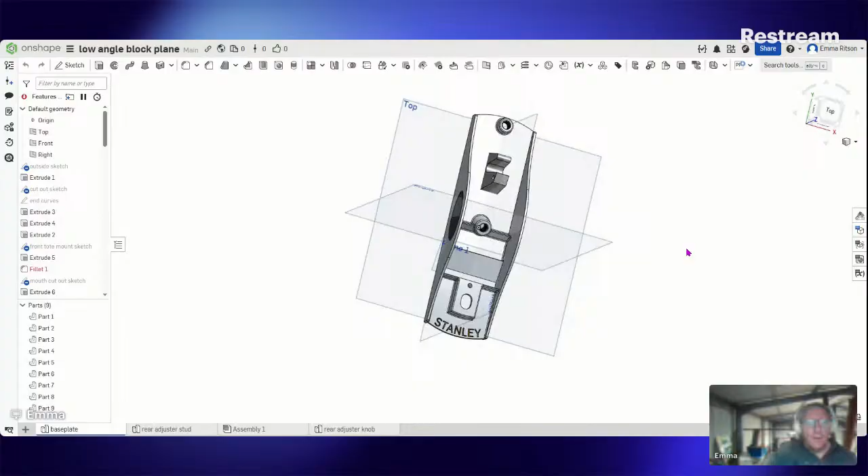I think that does it. Yeah, there we go. So Onshape, we're all familiar with it, we don't probably need to talk through it. This is what we got.

Now stirring up the lakes down there, that'd be nice. You need a shack and a case of fortified red and a spare weekend. Someone to snuggle up to. It's not snowing here.

So that's where we got to. I ended up cleaning up these letters and positioning them nicely around there. OnShape at this point, I don't think has an array letters along a line function, which is a bit of a pity. We've got a poor connection, sticker sticking up here, so let's see how we go with this.

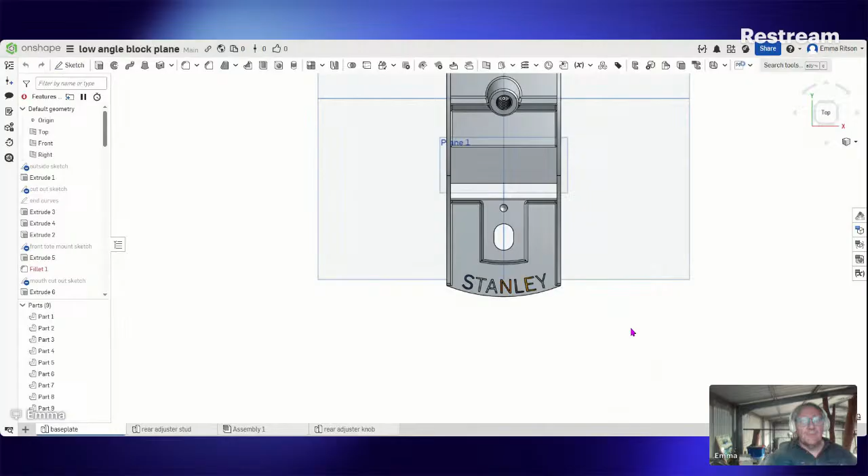All our letters are lined up as nice as I can make them. You find that if they're a little bit one way or the other, you can select them all and rotate them on the radius of that line and move them backwards and forwards so they're in the middle. So we can finalize that. They're all different colors, and that's because they're all different parts.

So down here we've got part 1, part 3, part 4, part 5, part 6, part 7, part 8, part 9. If we just use a Boolean union, and our tools is this, select that first, and part 2, select that, I think. Oh, part 4. Wait for it to do its thing.

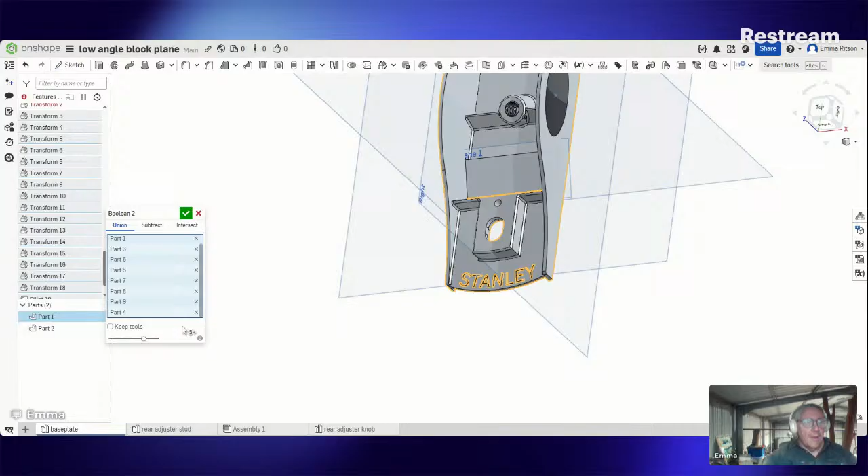And press there to finalize it. Basically, that makes it all one part, so that's done. That's not terrible. We need to do the same with this piece, which I've modified or arranged or anything.

We could just use a Boolean union, and this one, and this one. If we select them in that order, we maintain the surface finish of this piece when we put it together. Just as an interesting thing, if we reorder this, it changes to how it was on the other piece. See, they are different colours.

We've still got two parts, we've got that one and that one. So, Union, and the tools of that, part 1, which we haven't renamed yet, and part 2. We find that we've only got one part in here, and these pop up in this window as you click on them. So if we... there we go, it's looking pretty good.

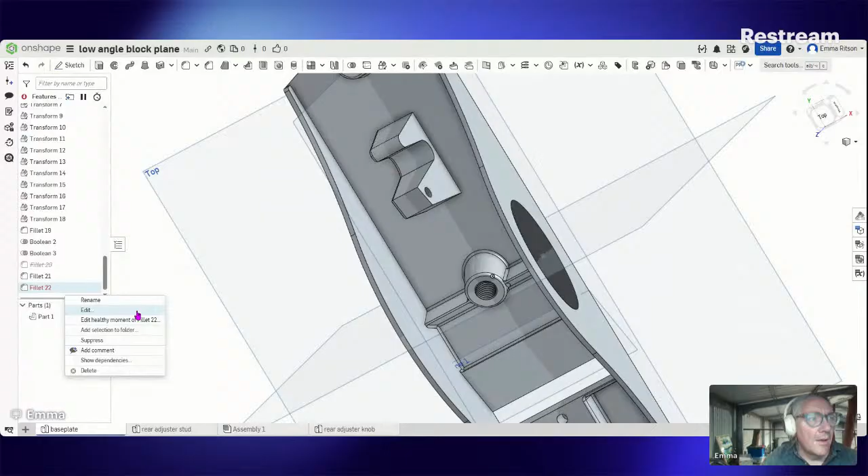Do the thing. There we go, we've got orange line again, so that should work. Now if we put this fillet here, down here, and unsuppress it, it should work still. There we go, beautiful.

So that's that part, it's pretty well finished. We've still got something to do, and that's to put a groove around the centre of this. Now I believe that was put in with the rotary cutter, so it's got a round corner in the front here, in this part of it it's got a round corner. I'm only guessing at the diameter, but let's do that.

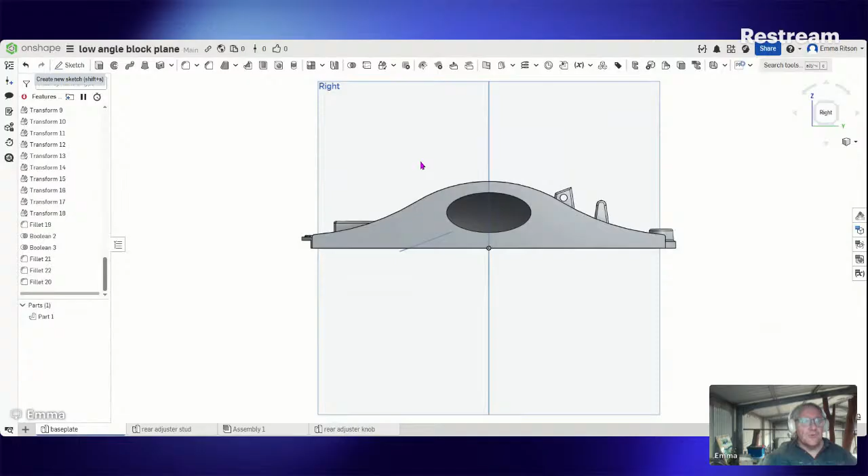Our right plane is on the centre line, so we can just put a sketch straight on there for that. And looking at it... oh gosh.

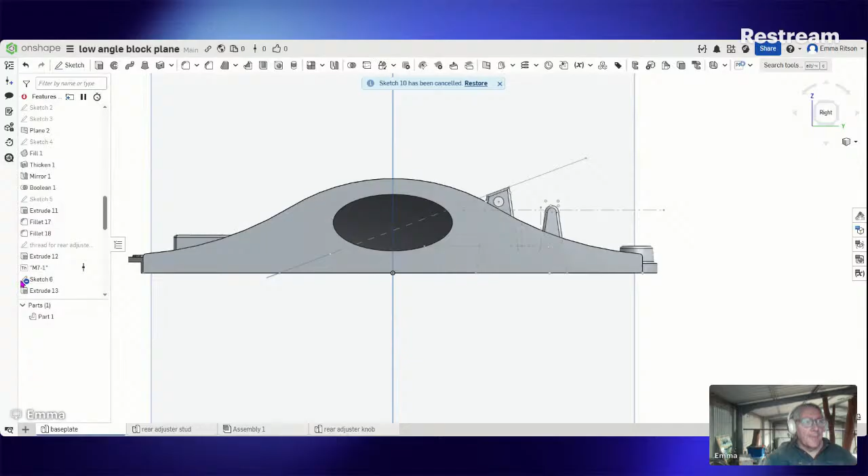Let's have a look here. Sketch 5, sketch 6 sounds right. Let's turn sketch 6 on so we can actually see it. And let's turn off part, or hide part 1. And all we've got left is if we make another sketch on the same plane, sketch 10 on the, and then we have a good look at this. The light here so we can have a look.

Could have washed this first, we've got dust everywhere.

Well, I reckon the centre line is about where that hole is, and we're about 5 mil up from this surface. So if we draw a line here, across here... escape, and put a dimension on there so that this one here is there and there. We're not far out.

I think we're going to change that to 4 millimeters because it's a little bit below that bottom, that centerpiece. Four millimeters. There we go.

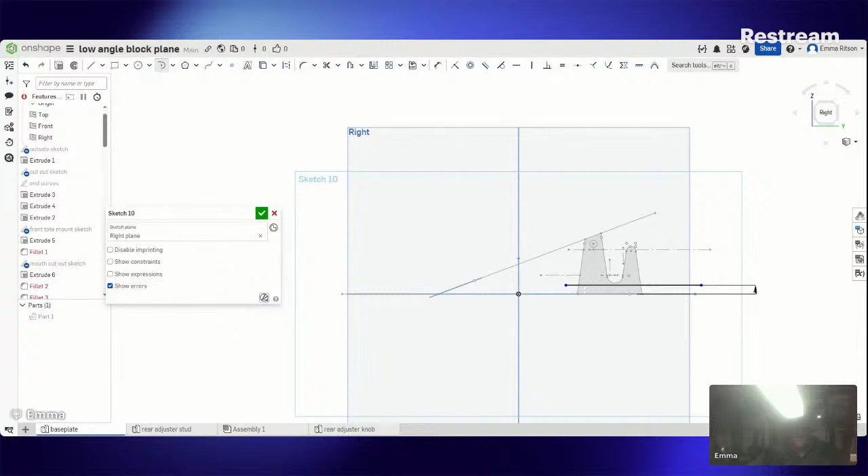And the curve, the tangent arc. Probably not the easy way to do it. Let's escape that and just put a center point arc there, down to there, around there like that, I guess, and we'll trim, which is the M button for a shortcut.

That out of there, we'll draw the rest of this box out of the way here. And hopefully that should shade itself in nicely there like that, so it's ready to go.

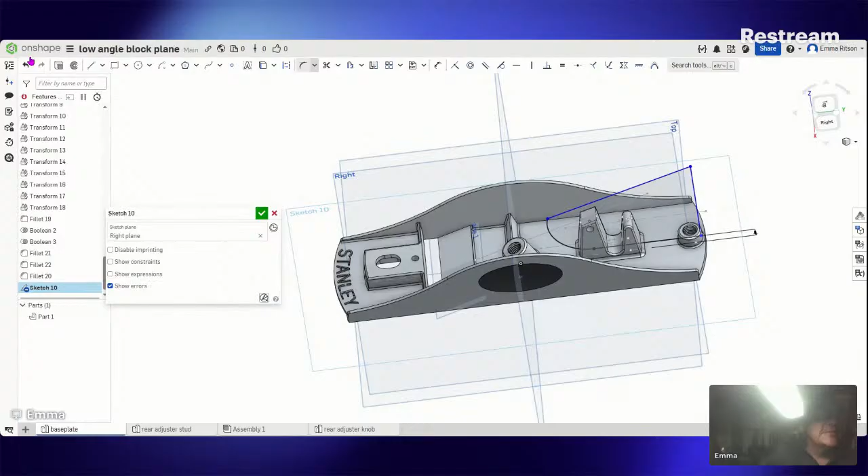And if we turn part 1 on, that's where our radius should go. Let's extrude that. I reckon it's 2 meters deep... 2 millimeters.

There we go, it's a removal. We'll remove that from that piece. And it's symmetrical, so it's 1 millimeter each side of the plane. And click that. We can turn off sketch 6 now. I'll hide that, there we go. If we press P, we can get rid of all those planes and have a look. That's looking pretty good, I reckon it's probably not far off what it needs to be. So there we go.

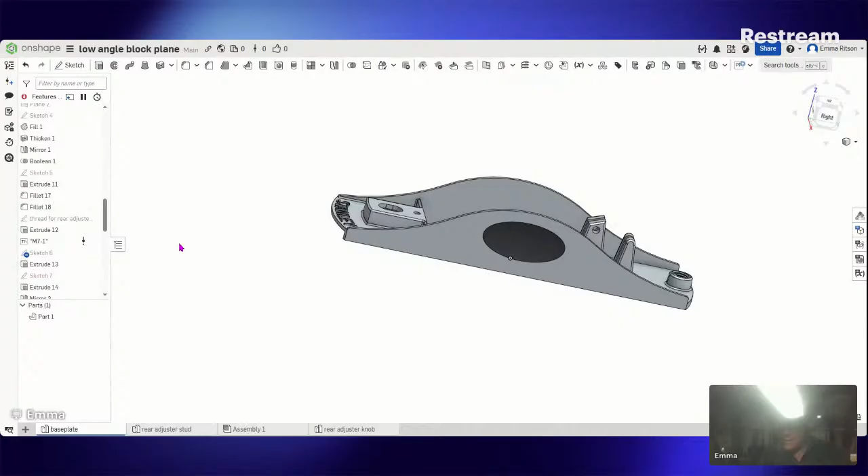So we could probably do a little bit of... we change the appearance, make it a dark grey all over. It's not terrible. And then we open this over here, which is our appearance panel.

We can add appearance to face, which could be that colour, probably wouldn't look terrible. And that one, our machine surfaces. That one.

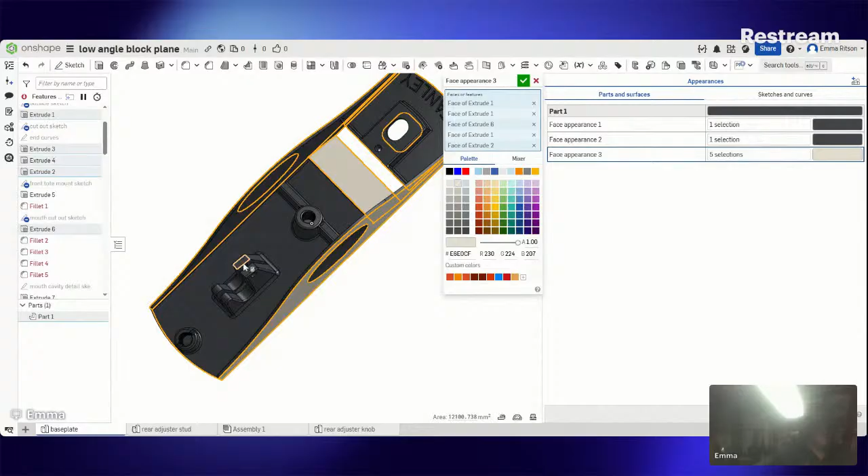What else have we got that's machined? This one. And this one and this one. And I've only got one of them, we'll do that one as well. There we go. And this end here. And this end.

And we finalise that, and that's looking something like. We can close that again, just click on that. And if we have a look at this, it's looking pretty good.

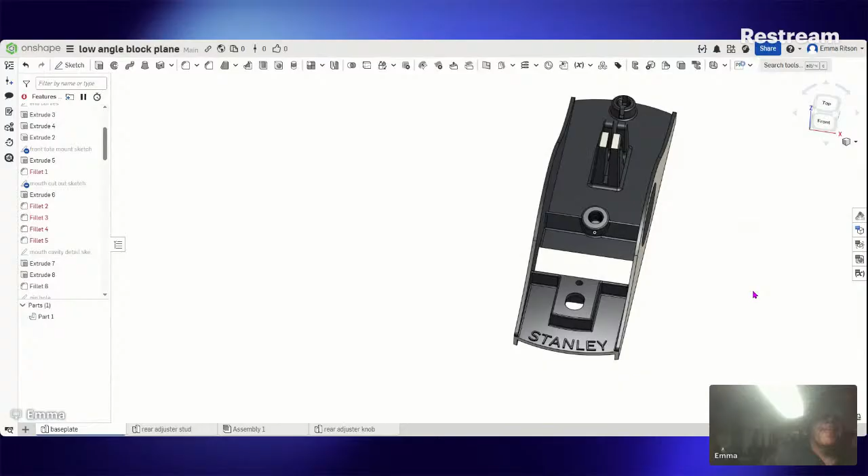So that's that part finished. If we have a look at our assembly where we were before, that should automatically update, and that's what we end up with, the brass nut.

Now we've got some animation sort of half ready to go. If we give this a spin, it goes up and down the thread.

What's next? What are we going to put on next? There's some levers and things. Probably this piece in the front looks a bit incomplete without that.

So let's do that, we start a new part studio. Create Part Studio there on that front corner. You can't see me at all because of the light, I apologise for that. There we go, we've got a new Part Studio.

What are we going to do? Have a look at the part.

Zero outside, that's a bit miserable. So this is the frog, or the front piece, or the, we call it the adjustable mouth. It's not really the frog. It's got an S and a B on it, I've got no idea why. It's got a raised boss there. It's got a flat surface. It's got a bit of an angle on this end, and it's got a round piece to match on this end.

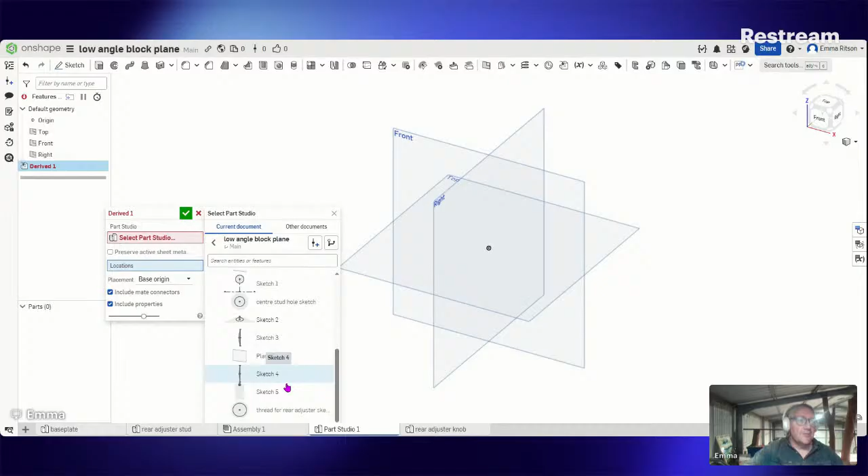So we can select the base plate. We select part 1. Or we can select one of these drawings if we know which one we want. That's a bit complicated. Let's just set the part. We should have one.

Our base origin, that's where it's going to be, just exactly in the same spot. What that's done is brought that piece from our base plate drawing into our parts, which we've got to rename. Adjustable mouth, we'll call it. So we have part 1 in there.

If we look at the bottom here, and we put a new sketch on this plane, which is right on the - use the use or the vector button. We can then select this line for our sketch, this line for our sketch, this line for our sketch, this line for our sketch, probably this line and this line for our sketch, and this line for our sketch.

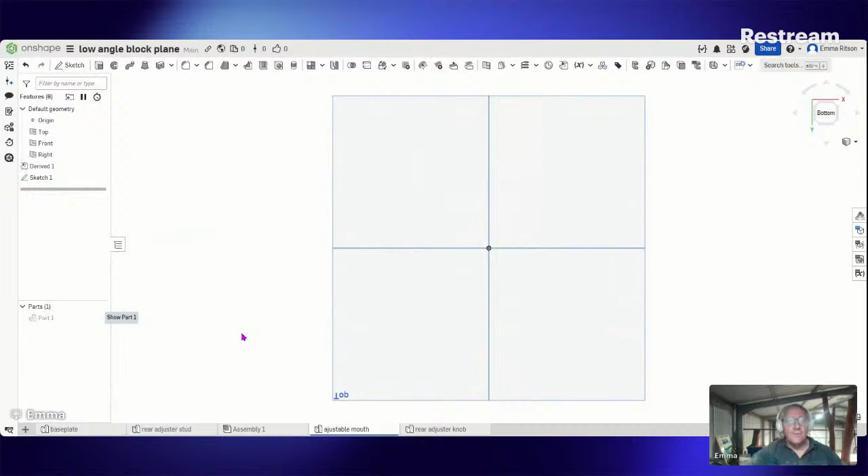Then all we need to do is turn this part off, close it, and find out that it hasn't actually done anything. Why is that so? Sketch on our top plane, and we're going to use the use button.

Let's try again. That one, that one, that one, that one, that one, that one, that one, I think. There we go, that worked. We turn that off now. We've got a sketch that's that part. Very good.

It's probably out of sync. Yeah, I'm sorry about that if it is.

Where'd my ruler go last night? Anyone remember? I'm at that point that I can't find anything. It's getting a bit beyond a joke, to be honest. It's under my mobile phone. Got a ruler. A little bit prepared.

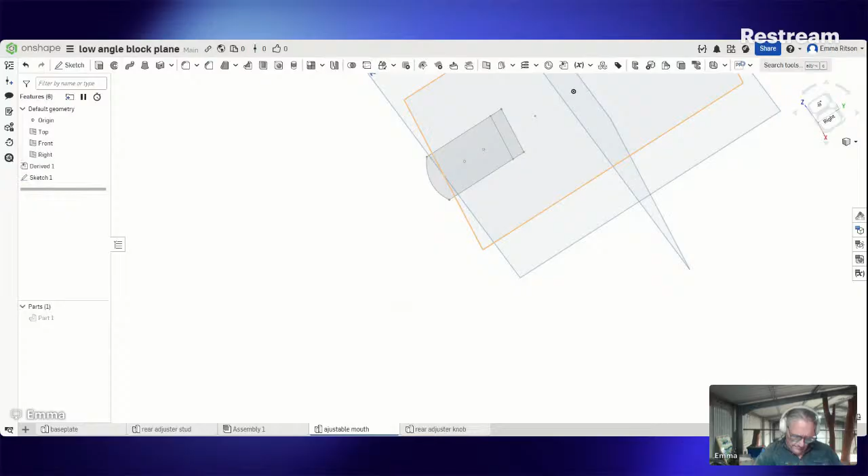N brings this round normal. Doesn't actually. There we go, that brings it round normal. Pressing in, we can zoom that in. Our measurement here - look at this sketch.

From this line to this point here should be, according to this, probably 42 mil. So 42.

It'll try to change that, but it won't have much luck. So what we do is click on that and press delete, because that's the one that's holding us up. Or it was the one that was holding us up.

There we go, it's that one. That's not parallel, so it must be this one. Nope. Nope.

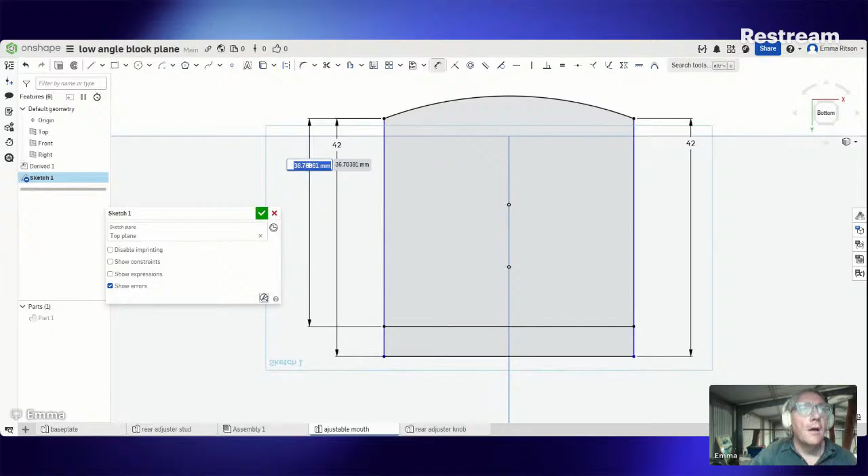It doesn't work. Control Z is probably our friend. Let's delete this line. We'll put another line in. Press that and Q for a construction line. And we'll put a line across here, something like that.

Then put a measurement on that. Because that's not a derived line or a projected line, it won't give us problems. There we go. Doesn't seem quite right, I'll have another look at that. We'll call it 39, I think.

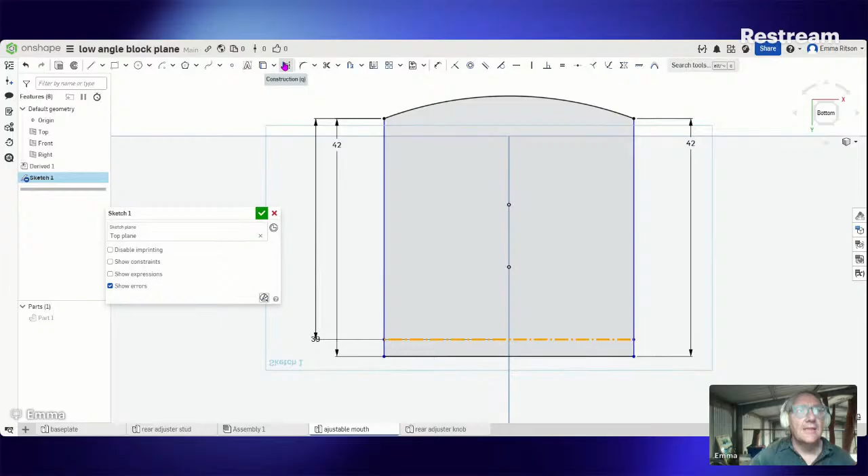So we can press M for trim. We can trim this one. We can trim this one. Press escape or click that button again to get rid of it, and then highlight that. We can select the construction, or press Q again, and it changes that from the construction line. There we go, so now we've got that raised up bit.

There's actually a pattern around this piece. I think we're going to offset some lines on the sketch. We've got 2 lines selected by some crazy mistake. I'm just going to select one, then offset. Do it. And it's offset it the wrong way. So we click that arrow, just reverse it. And then left click, and it comes up with a little window. That front one, I reckon, is about 4 millimeters.

Hey, Mark. My network's probably not good, to be honest, and it could be my computer.

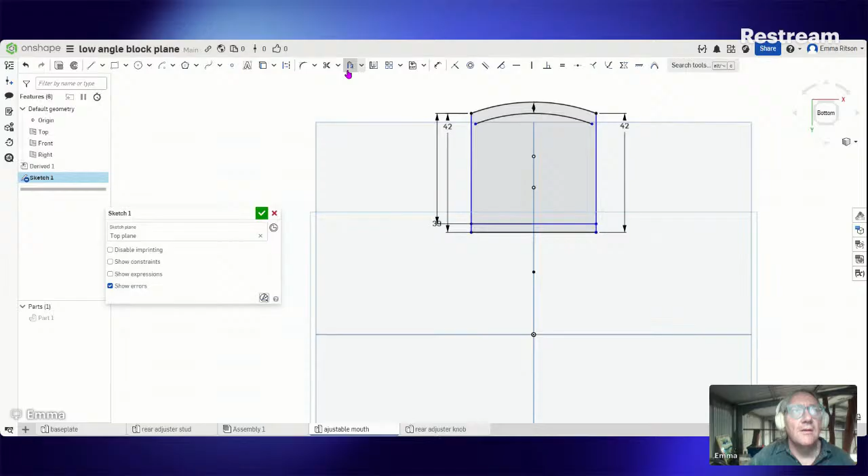Trim these ends here, like so. We offset this sketch line here. It just offsets the sketch.

We can probably mirror this one. Well, let's do this first. Before we do that, another line, just a piece down the middle here. We might put that line down.

It's about 1.5 mil off the centre. .5. There we go. Let's trim all this up, just for the sake of clarity and to make it all work when we start.

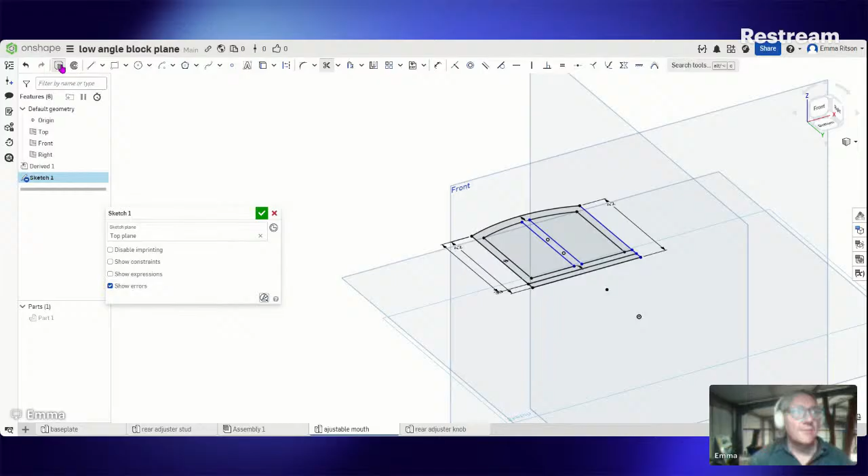Anyway, let's do some extruding. Make this into an actual real part.

We can start with that piece. I think that was 4 millimeters. I may be wrong, I don't remember what we actually drew it. But let's start with 4 because it's got to match the other piece.

It automatically turns that sketch off. You can change that in the settings. I think if it's annoying you, it's not a bad thing because it keeps everything clean and tidy.

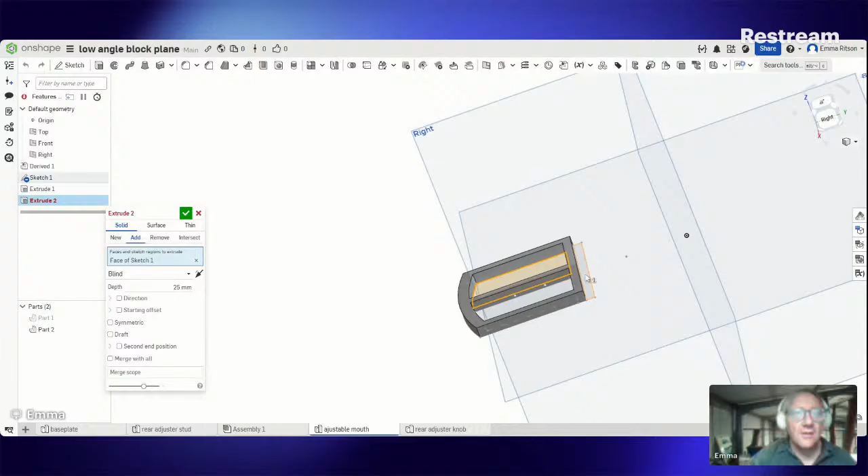If we extrude this section and this section and this section, at 3 mil, that gives us our piece.

Now there's a boss in the center, and we've got to remember that this is on a funny angle here.

Yes, it's a AAA multifix on an A2 lathe. That's very correct, well spotted.

I think it's the default thumbnail. I'm not sure why it does that.

Now this has got about a 4 degree angle on the back, I think. It's a good question, but it's not very much angle, but I think it's there.

Put a sketch on there. Fix that quickly.

Parallel line along there. And dimension on that angle.

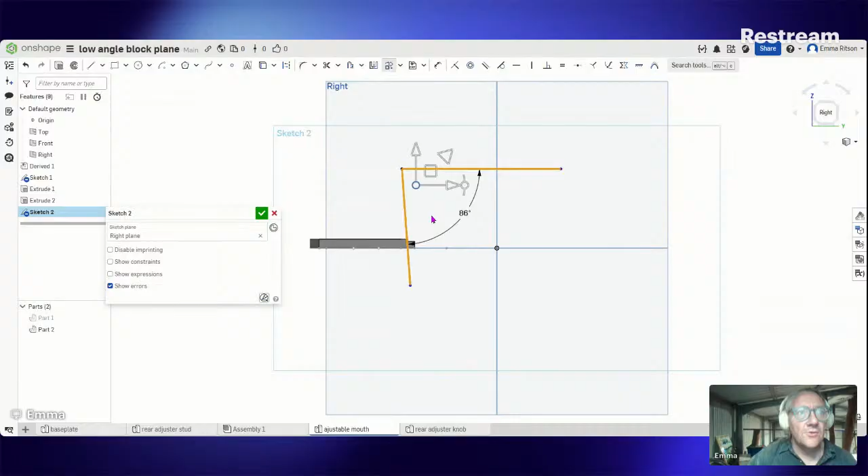And we want to transform those two lines. So the sketch, we need to drag this one and this one. If we select this center circle, we can move this nicely to there. And we can drag it up until it clicks onto that line. And we can drag it out.

Yeah, I'm going to do that again. Something like that.

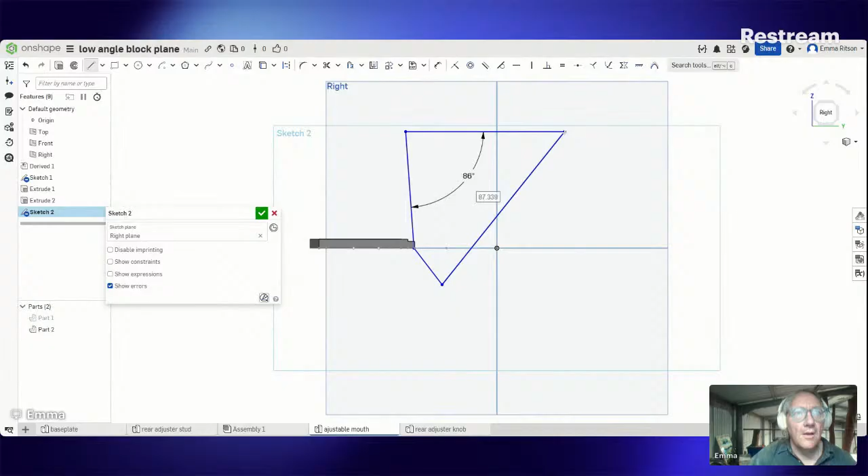Complete this box roughly like this so that it fills itself in so we can extrude it. And click the extrude button.

We need to remove the parts and be symmetrical from the center.

And rather than blind, we'll just go through all. There we go, so that's done.

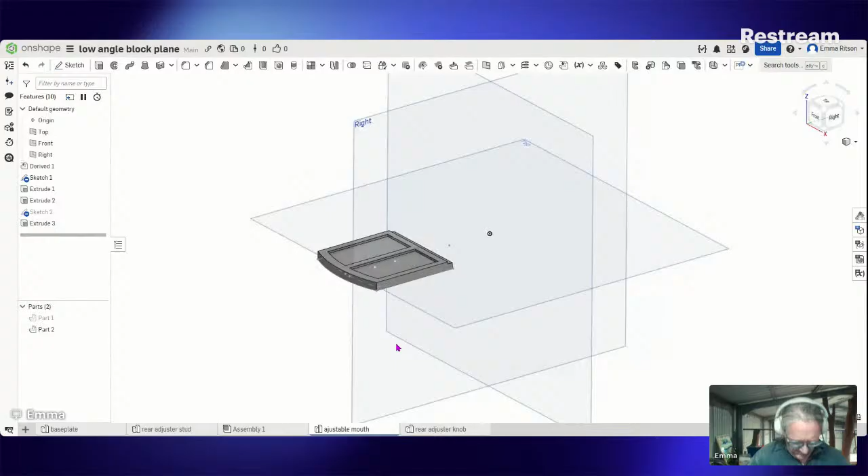There's a couple more features. First one is a boss here in the center. You're going to double check that. It's about 24 millimeters from the top corner.

A new sketch on this bottom plane. And a circle, somewhere there. It's not 15 mil diameter, it's more like 10. And we're going to put a measurement on that.

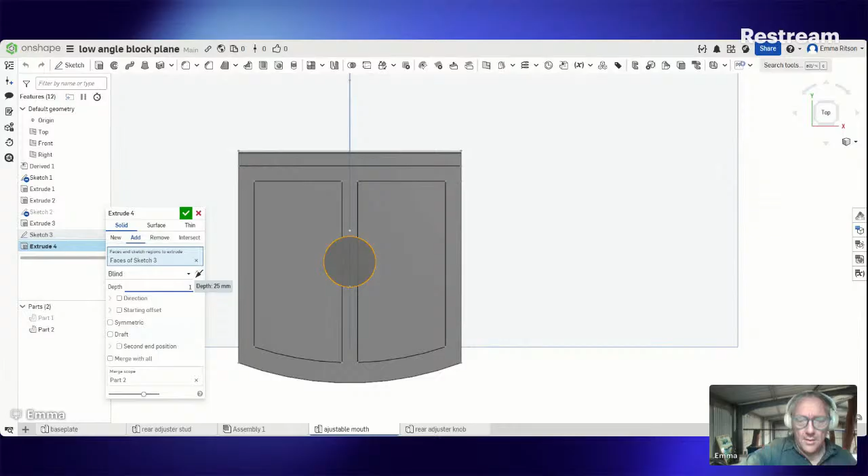$24 mil, we said. There we go, let's extrude that. From the bottom plane, it wants to be probably 10 millimeters tall. And there's a shaft on it.

$4 sounds about right. It's still automatically selected add, so it's added it in as part of that. We'll put a 1mm fillet around that, and so you get the cord, excellent.

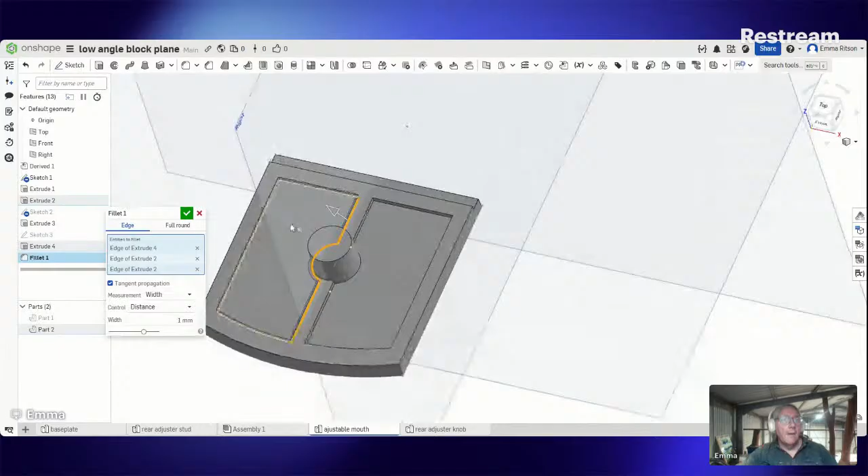Can't do that. You can do that. There we go.

So it's starting to look something like it. There's a thread in the middle. Done that, 109 mate, no idea.

Now this has this nut screw into it, which is a bit fancy. And looking at that, it's about 5mm. It's fairly coarse, let's call it 5mm.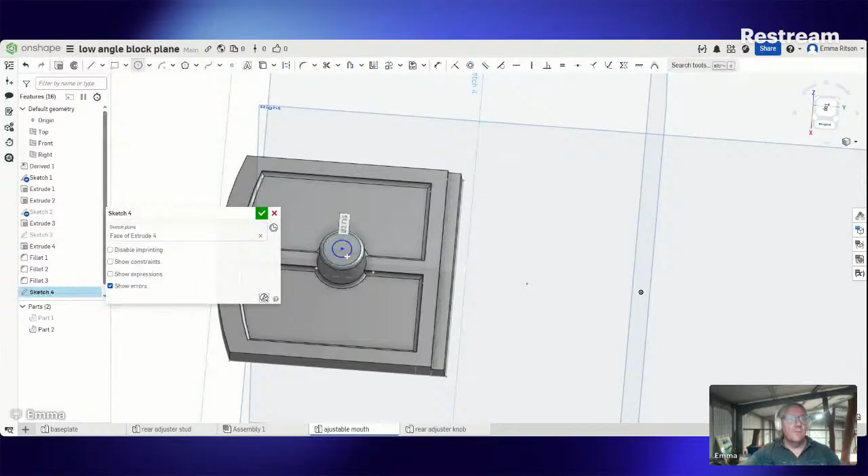So we'll put a sketch on this, on top here, and find the center of it and put a 5mm hole. Extrude it.

Just screw the nut in, the bolt into it, and it appears to be about, what, 6mm deep. So if we go 6...

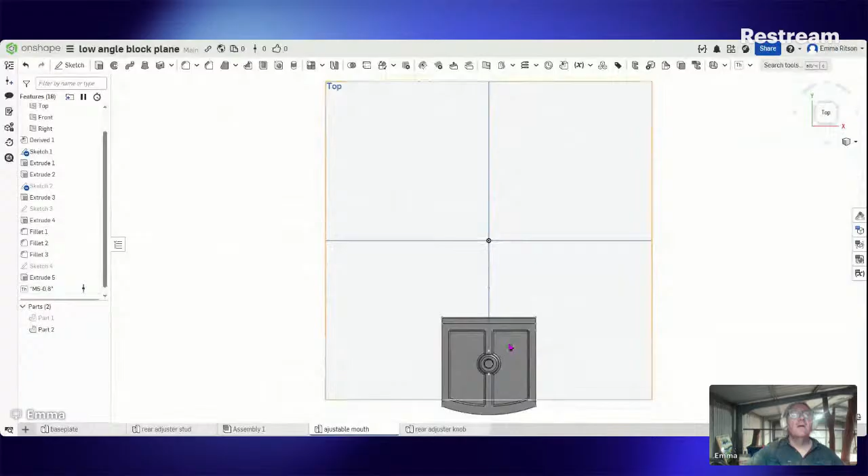That bit's pretty well finished. It has got some initials in it, will we bother doing them? I'm not sure why, but it does have an S and a B in it. What happens to S and B that way?

Proprietary threads, not so much, but there's some odd stuff that we think now is proprietary, but it's actually German standards before the rest of the world got a look in. Instrument threads in particular are very... I don't know, they're language oriented, they're country oriented. German instrument threads are very unique, as are British, as are American, as are French instrument threads. They're all a little bit strange, but you'll find the Lorch has Löwenherz or Loewenherz threads, which is pretty odd. Don't get much odder than that.

Anyway, we need to turn this around, so we'll go to this little arrow here. We'll select this one, swing this around so it's the right way up. And we'll put a sketch on this surface here.

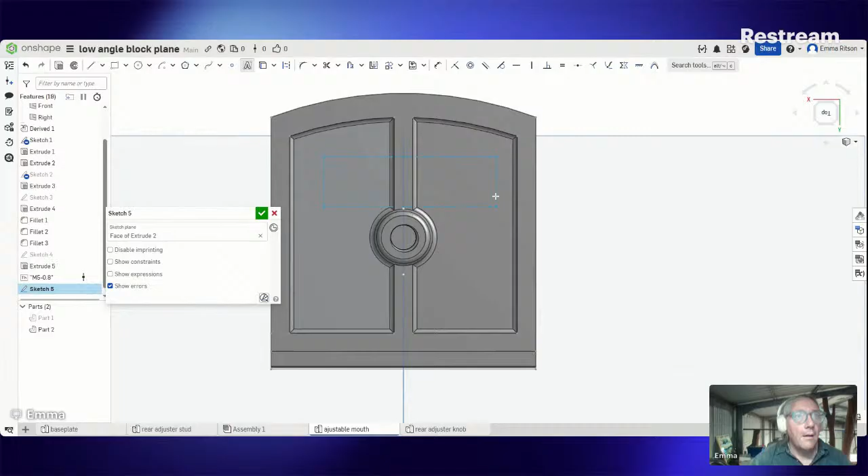If we move up here, we can scroll out and we can move this in relation to our cursor. These are going to be pretty rough. Come on, do the thing.

Let's move that around there. Let's move that across there. Move that down there. Put a measurement on it.

It's probably 7.5 millimeters.

We're going to put another measurement between here and we'll call it the center of that. No, here and here. We'll measure that with our ruler just to see what size it is. We'll call it 35. It's about where they need to be.

Click here to edit text. Go and click that. Then edit text. Two more spaces in there. It's probably the cheat's way of doing it. We could change and do them all separately.

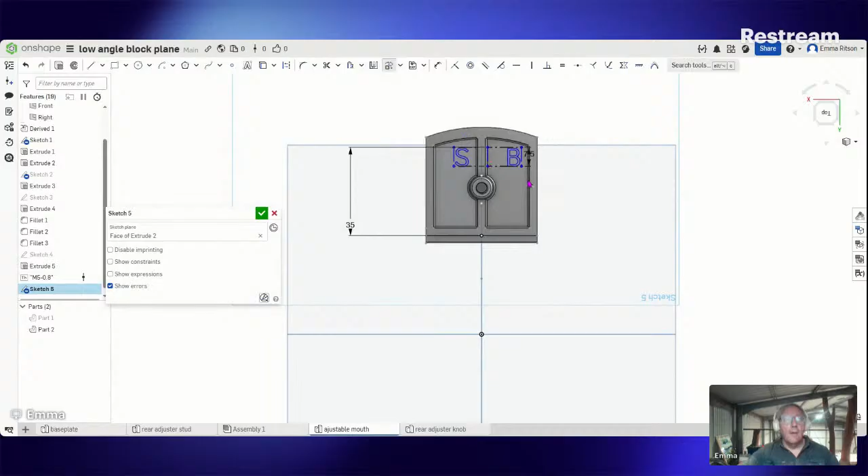We could extrude that sketch, and it's 1 millimeter that sticks up. So there we go, that's that part.

Let's do the same thing. We should rename that because otherwise it's going to be hard to find. We're going to call that the mouth.

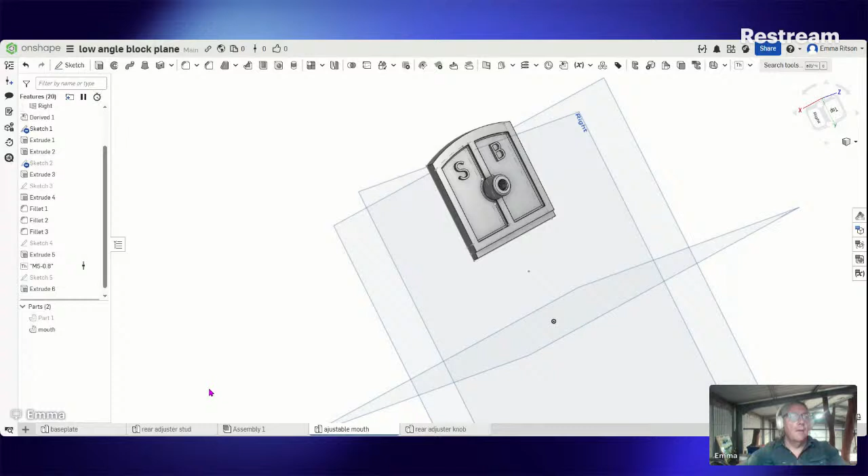And if we right click on that, or right click on this piece, I think we've got to, we can edit appearance for mouth. Dark grey, match. And click on this.

And add appearance to face. Probably that colour, was it? Looking at that. It's machine surface and the machine surface.

Machine surface. The back is a machine surface. And this one, and this one, and this one here.

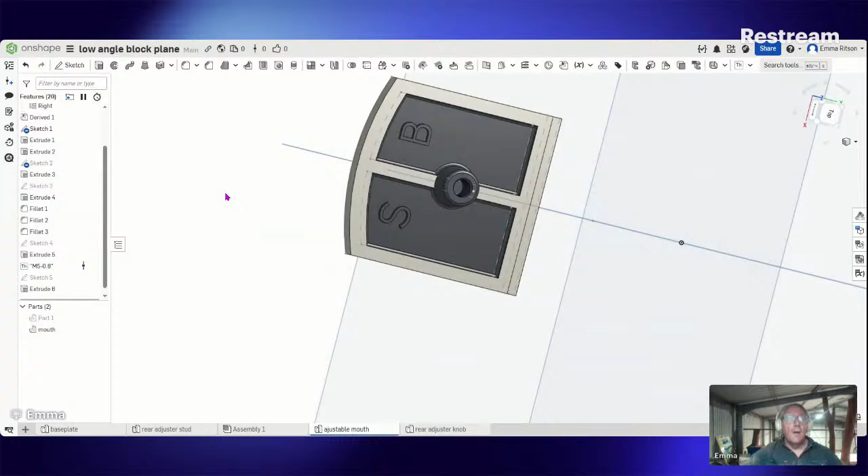There we go, so that's that part finished. And because we've taken it off this part, it should actually line up very nicely when we just insert it. So to insert it, we click Insert, we click Adjustable Mouth. And without moving off this window, we click that. There you go, sorted, job's done.

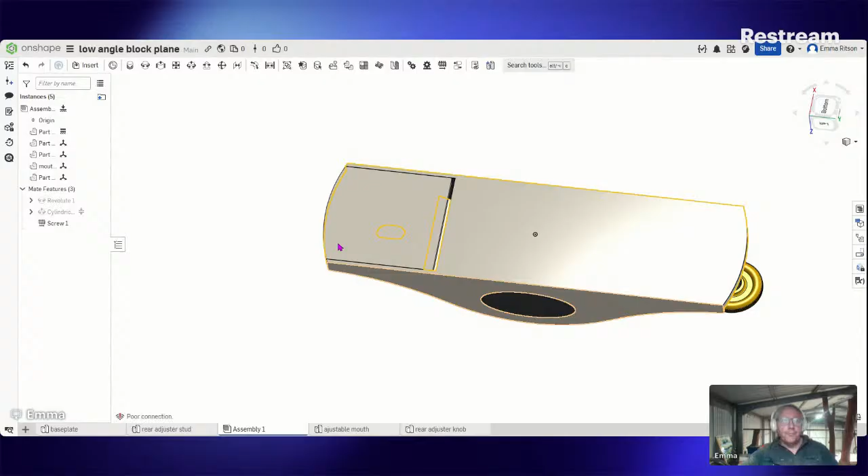So that's that. Where are we going? How are we going for time? We've been in an hour, which is way longer than we probably should be anyway. But anyway, we can make some other bits.

Let's make this brass nut for the other end, the brass nut that goes in there. I think that's the next part. We could probably put a slider mate on this.

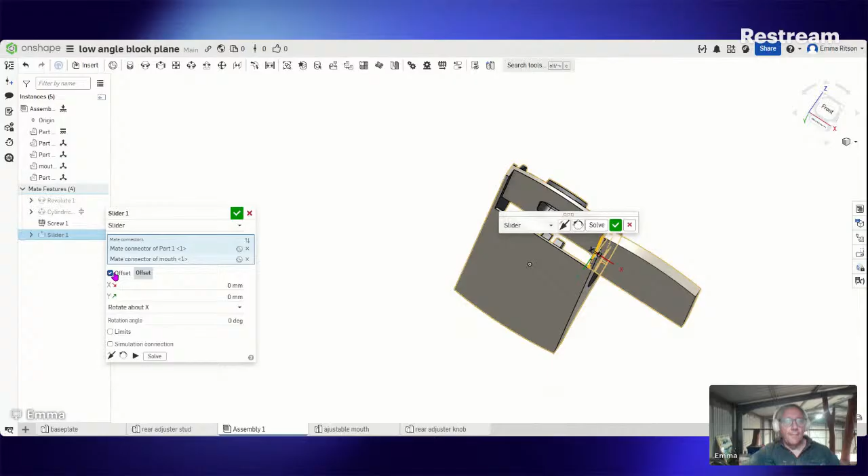We just need some offset, because we've selected, for ease of selection, one each side rather than try and select the same mate 10 times. So the red arrow there is the X, looking at this up here. So our X offset needs to be, was it 40 mil? It's getting close, not quite, 42.

Look at the front. So 43 maybe. We could go back and look it up. There we go.

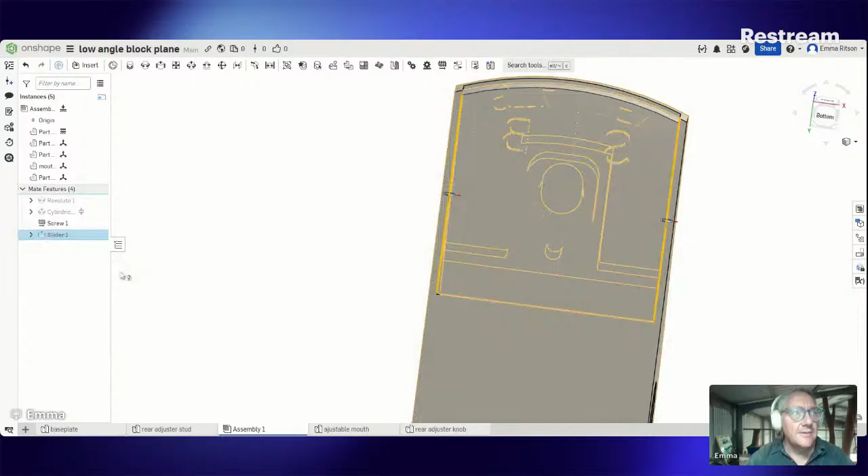It's got a slider mate, so we can actually adjust that. It pulls backwards and forwards, it won't go any other way, and we can adjust the amount it slides backwards and forwards. So here we can change our limits. We'll go into this a bit more, but we edit it just the same as a sketch or anything else. And we've got a limits selection here. We'll check this, but that's probably not far out.

If we change the number of steps to say 60, it'll run a bit quicker and you'll be able to see it. But look at the animation.

That's probably about where it needs to be. If we have a look at this and make sure that it doesn't bump on anything. See, that's too far that way because that thread's going past the end of the hole.

I reckon it only wants about 3 mil, so let's change that to 3, and try again. It's not even that much, 2.5. That looks pretty sweet, so that works.

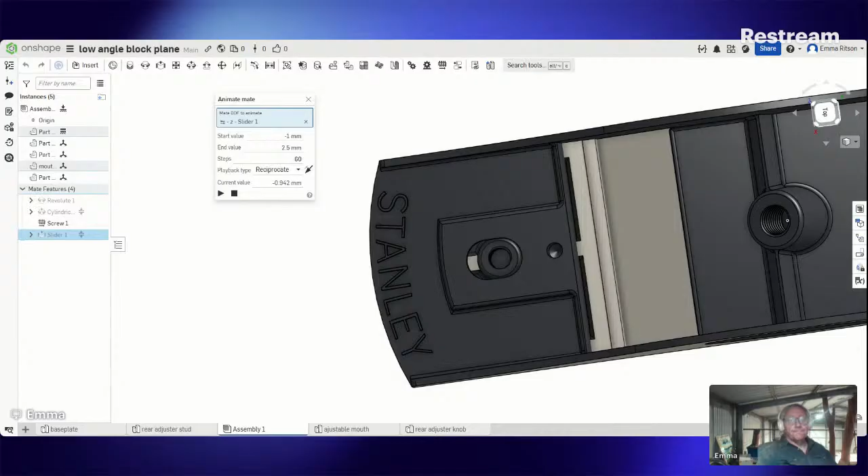Very good. Start, yeah, will we put that on there? Or will we make the blade and put that in?

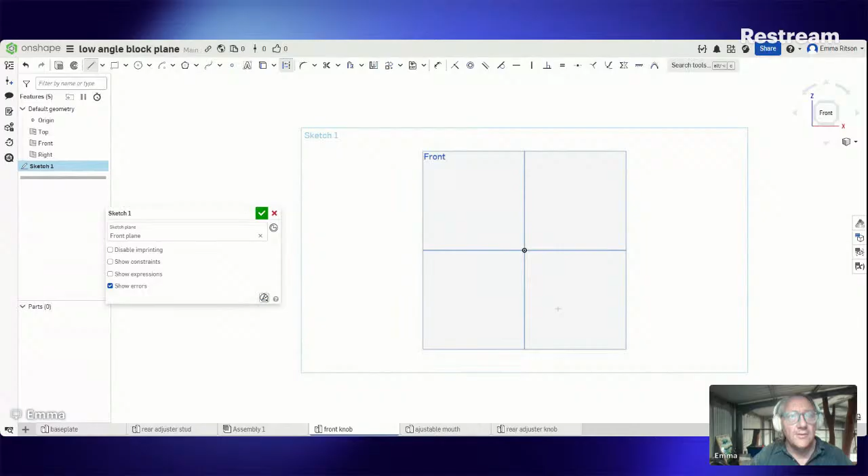Now we're going to revolve this round, so let's start with a sketch on the front plane, like this. And a line, we'll press Q, which selects our construction line. First thing, if we're going to revolve something, we'll always put a construction line in for the center. Press escape, you don't have to put a dimension on in the way.

We'll start here, it's a flat end on that screw, so we're going to come out here. Was it a 5mm screw? 12.5. And the screw comes up here. How long is the screw? Nowhere near 33 mil, could be 11. I could say it's 7/16, but 11 will do. And it's getting a bit small, so I'm going to just scroll out and blow that up.

Now we're going to draw a line across here somewhere, just roughly out there like that. And another one like that for the top. And another one for the bottom of the knob.

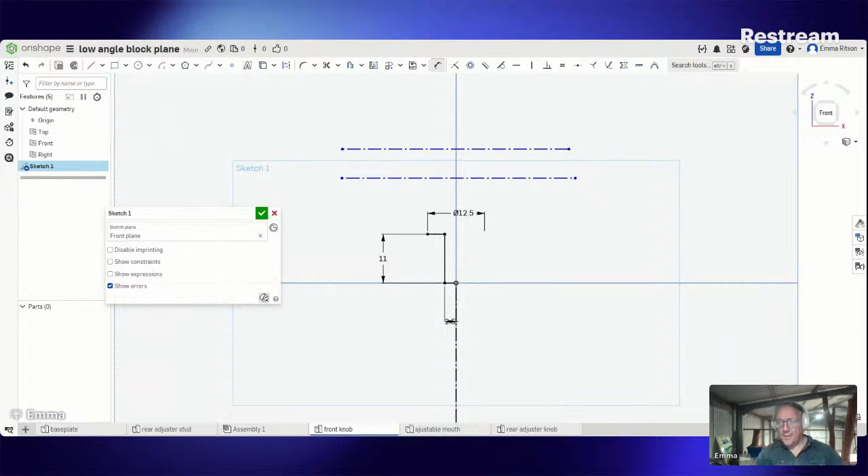Hey John, we're messing around. That's what we're doing.

So this top one is 23 mil above the top there, so we put a dimension on that from there to there somewhere. It's not that big, it's 23. This one here, and this one here. Call that 20.

This measurement here, click on there. Has to be, what diameter is this knob? We'll call it 22 mil.

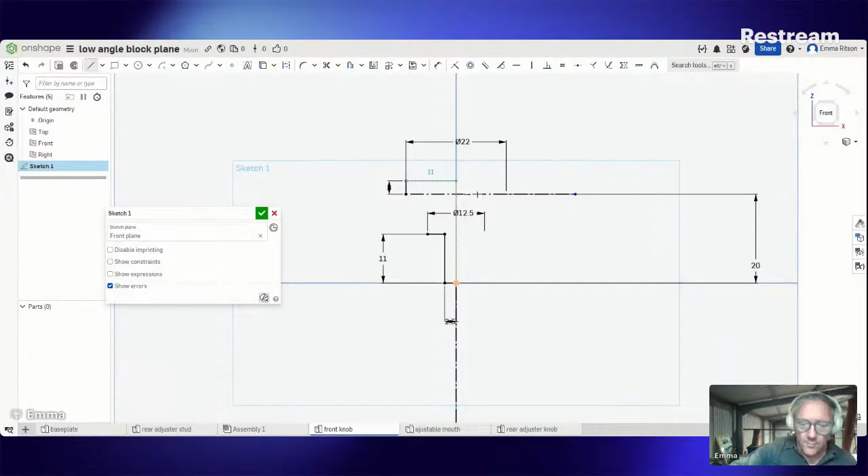And there's a dish in the top. Seems quite a dish, but I reckon it's only 3 mil. But we need to mirror these, for the purposes of this, and a 3-point arc.

We're going to guess that. Call it 17 mil radius. That'll do, that's what the top of that looks like. And then there's another radius from here down to here. We'll do the same thing, we'll go from there.

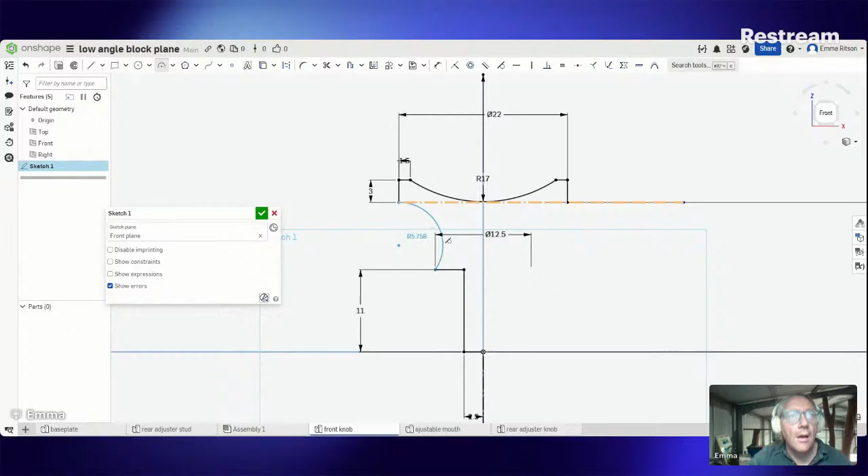Okay, that's about right. That's what the knob looks like. You can trim this side. Don't want to do that.

What we want to do is extend this construction line all the way through to there, and that gives us a basis to trim from. Trim that one. Trim that one.

And we can turn this one here into a solid line. So trim this one, it's a bit sticking up. And revolve it, we'll use this one here that looks like half a donut.

Plus 2 Stefan videos, it's not a hardship. I'd rather watch the 2 Stefan videos.

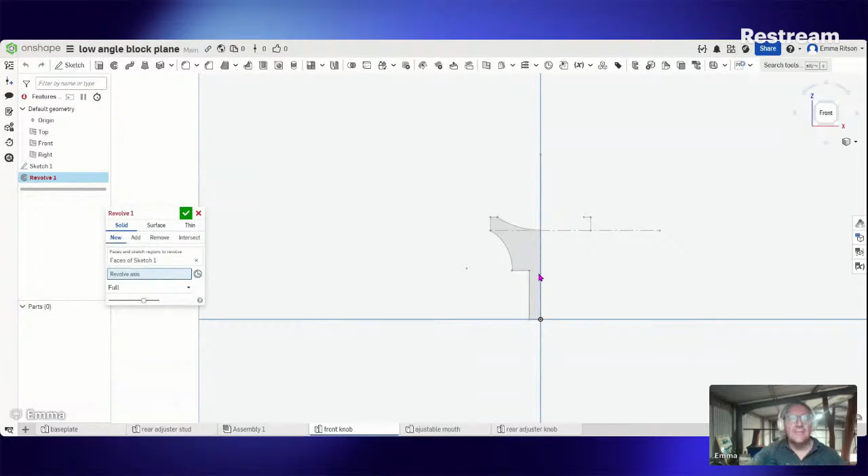So face of the sketch one, and our revolve axis is this centre line. Right, it looks something like that.

We can put a thread on there. It's a bit crap in blue, so I'm going to change that straight up. Let's click on that and change edit appearance.

Let's change it to that. I don't know if that's the right one, but it looks a bit more brassy. I'm going to rename that. There's several ways we could do that. We're going to click on here to rename it.

And we're going to put a thread on there. So drop this down as the thread creator. It puts proper threads on things if we're going to make them all mesh together.

There is a whole function which puts sort of a fake thread on.

With an ISO thread, we want a 0.8 pitch to match the other one. Single start, and it's not fully threaded. There's a couple of mil at the top that aren't. So, and our distance.

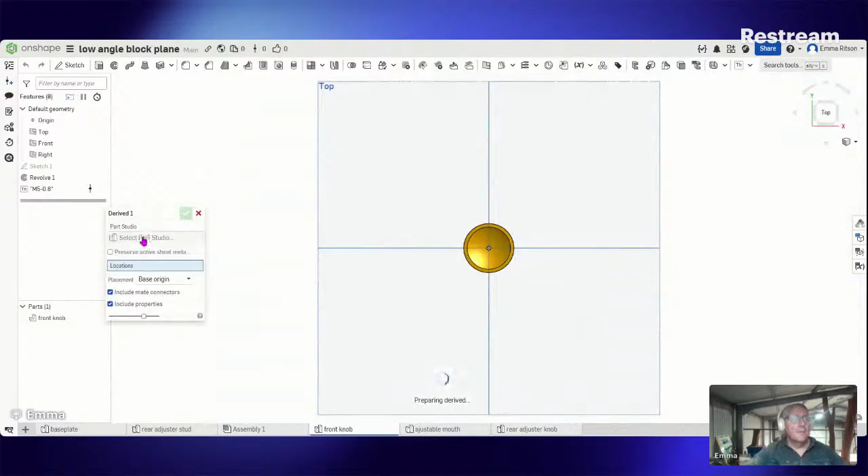If we use the derive tool again and do the same thing. Select Part Studio. Rear adjuster knob, part 1. Sketch 2 is what we want.

What we've done is put part 1 in there with this sketch that we use for the knurl. We drop this down, we've got sketch 2, and we can edit that. Actually, it's a derived sketch, so we can't.

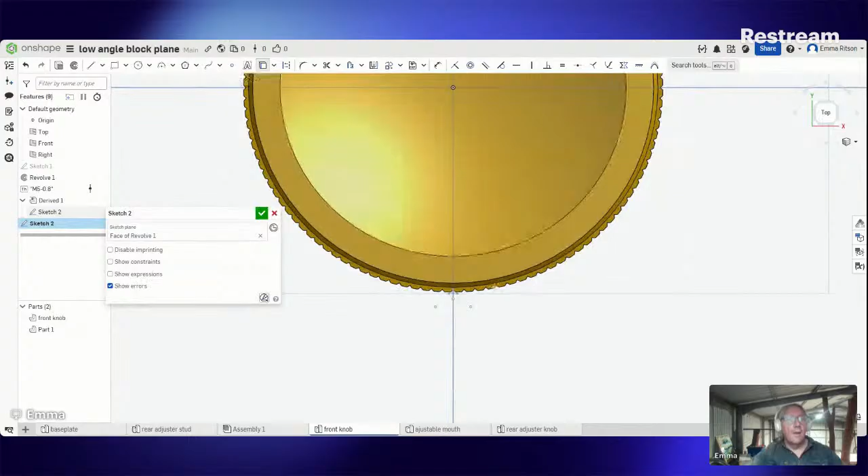But the best thing to do is to make a new sketch on the face of this, and use this part of the sketch. It's not going to work.

So make that window, that one, and that one. We've selected way too much of this, so I'll delete that.

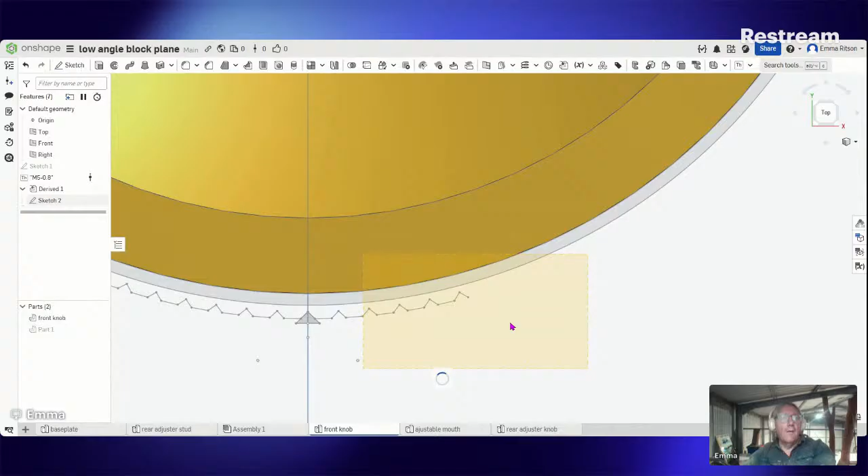Sketch 2, we're going to have to edit that. What have we done? Control Z, our friend. Let's do sketch 2 and edit that.

A new sketch, that's what we were doing, on that plane. We need this little triangle.

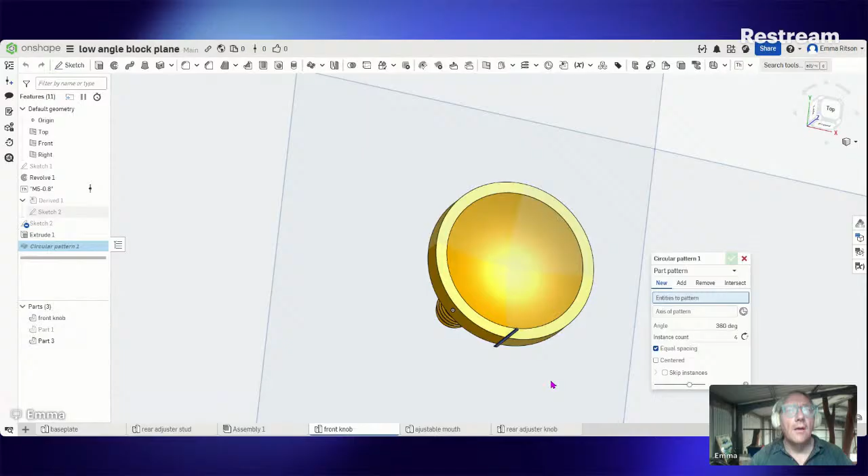Circular pattern we need, yep. Axis of pattern is going to be that.

I'm not even halfway up where John is with knurls.

Where are we here? That's around behind my head. Where's go? It's this one. Anyway, we've got a knurl on that.

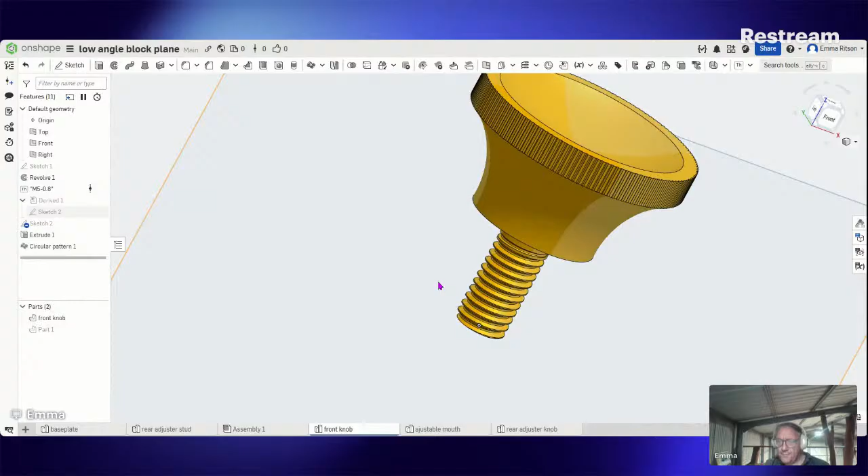Anyway, that's the knob. Search tools here for knurl. Item searcher on the... so let's look for.

We drop this window down and add custom features. It's loading.

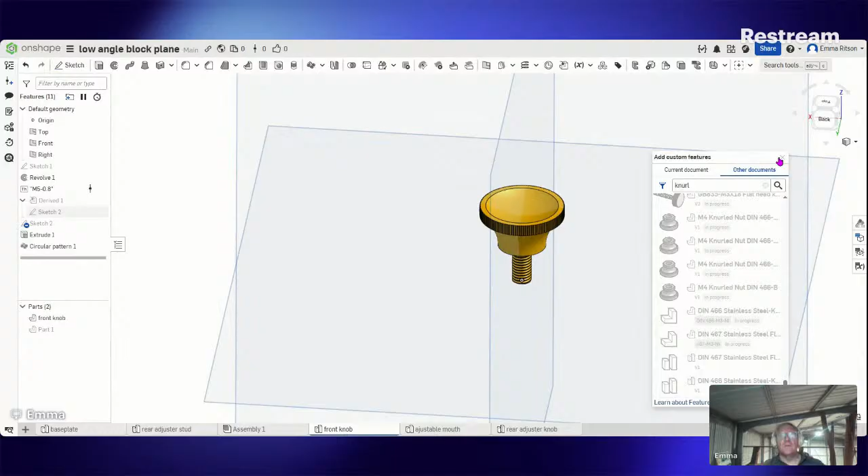I'm sure there's a part studio, a feature script to do it. Can have a look this week and I'll report back. Yes, we might just use it. I'm sure there would be.

Anyway, we can put that in our assembly anyway now. We might call that.

Anyway, insert, and it's going to put it right in the middle there. See? So we'll put this out here.

What we haven't done is deleted that second knob. We can click that and just click the one and insert that rather than insert both. Might do that, it's easy enough to click that. Backspace. Like that.

So, Revolute Mate, I think. Screw threads.

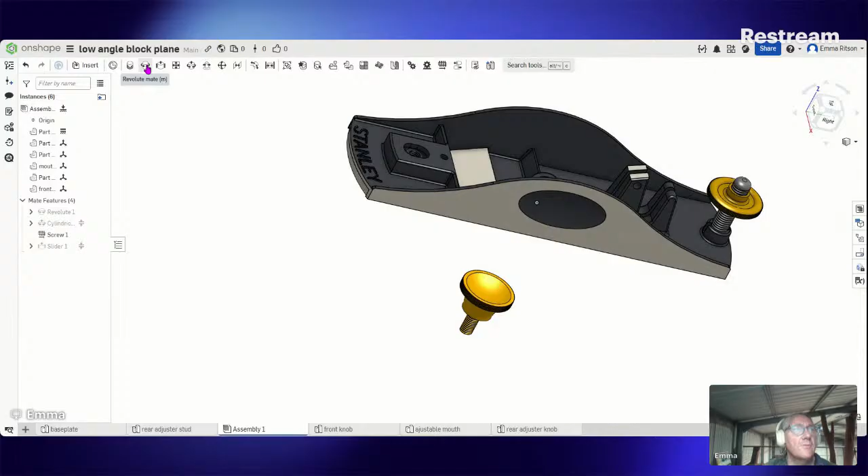One cylindrical mate we need, so we'll make a cylindrical mate with this one, which means it can slide that way and turn. Slider, Revolute, cylindrical mate.

We'll call that surface, which is the nice round one, and that surface, which is also nice and round. Click on the front. It needs to be offset a little bit.

I need some limits. Click the limits. So I'll slide this up here so I can actually see it. Let's go -2. And it needs to come right out, so probably 4 millimeters. So the limits is just trial and error, really.

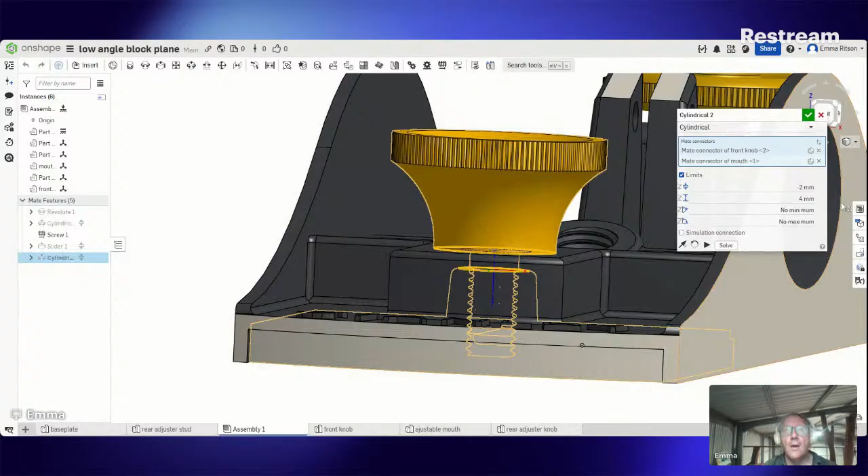It's not enough, I'll mess with that a bit more. So 2. No. Wrong way. -7 that way. 6 that way, let's try that. Not quite.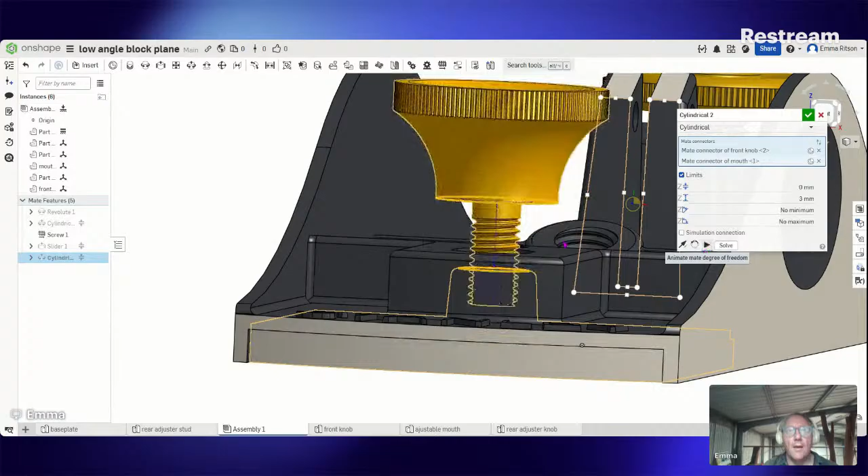Let's just mess with this until we get it right. Refinement, primary axis, and see what we end up with. Limits are a bit tricky. Maybe that's what we need. Maybe we're overthinking it. It doesn't work.

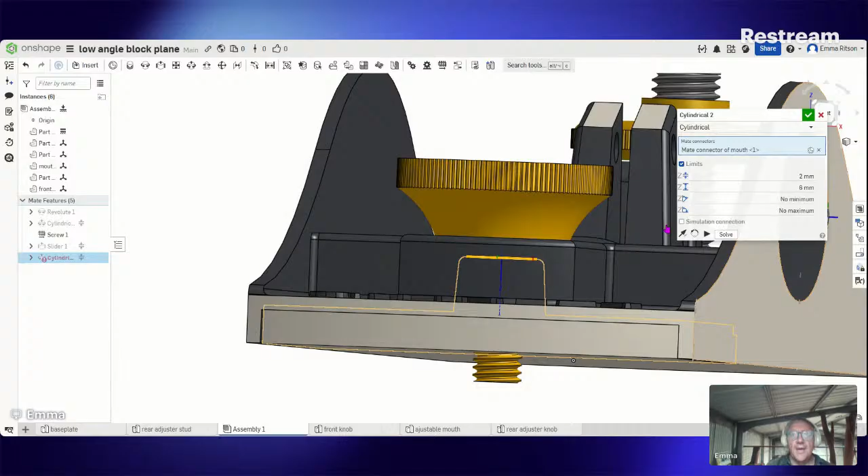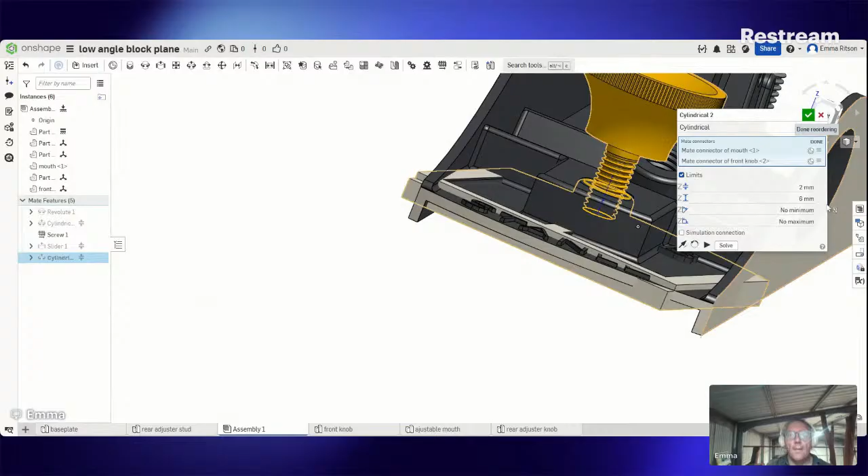Let's change that, make the mate connector here. We can't make it there. Which one's the middle? There. Is that right? Yeah, it's doing all sorts of things. You can use the surface as a limit, yes.

Anyway, let's put a screw on that anyway, on this cylindrical mate. The distance per revolution is 0.8.

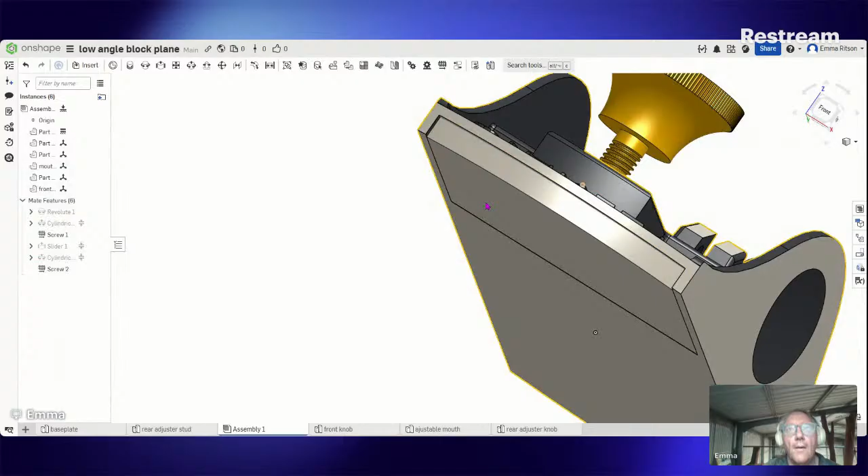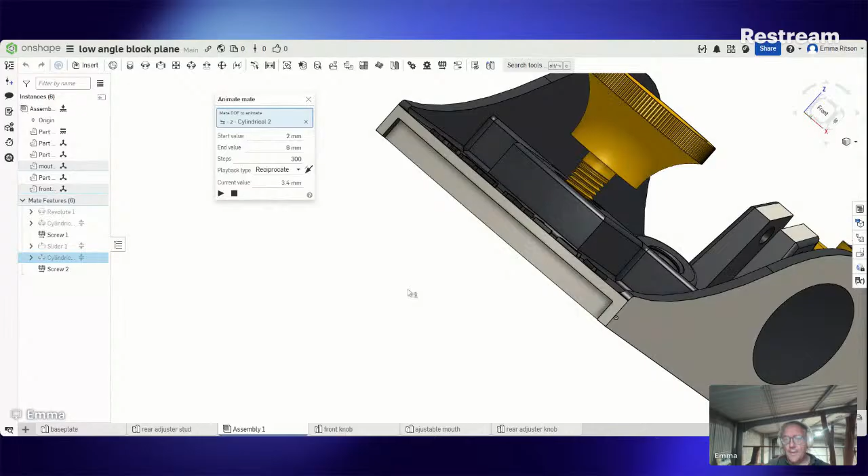We might do a little bit more on that, and a bit more when I'm in the mood to actually animate these properly, because it's not right. Anyway, knob's on.

There's another piece to go under there with a little pin in that hole, and that should make it so that when you slide this lever backwards and forwards, this actually moves in and out. So we should be able to do that without any problems.

Anyway, I've probably had enough, but we're getting there. This animation here needs to be set up better, and I'm going to have a play with that in a refresher course, and I'll come back and we'll have a look at that.

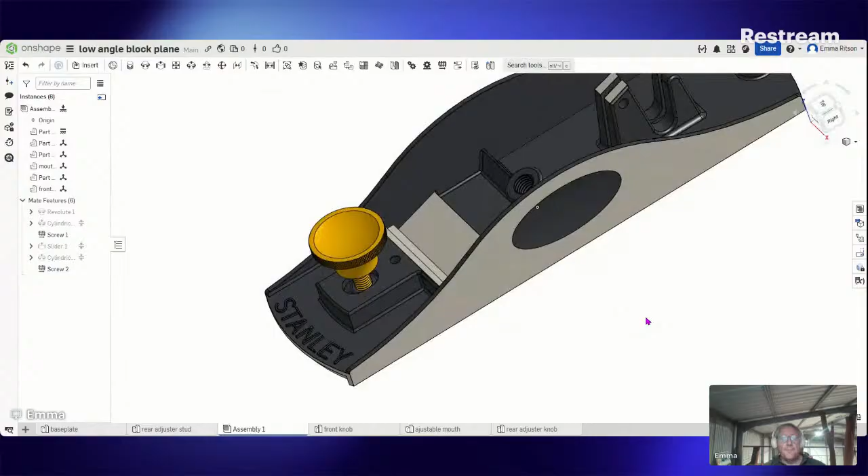This little piece lever that goes in here that slides on this knob's the same. I don't think that one's quite as complicated. And then when we've got that in and this lever on here, we can start thinking about putting a lever on top of here and a screw and a plane.

What we can do is put a screw in here. Now this is an M... looking at it, we're going to have a look. It's M7 by 1. So on our assembly, we can go to Insert, and Standard Content. See it, ISO bolts and screws, M7.

Doesn't show it. Look at that. Not helpful. Slotted head screws. Cheese head screw, countersunk, raised countersunk, pan head screw. That'll do nicely.

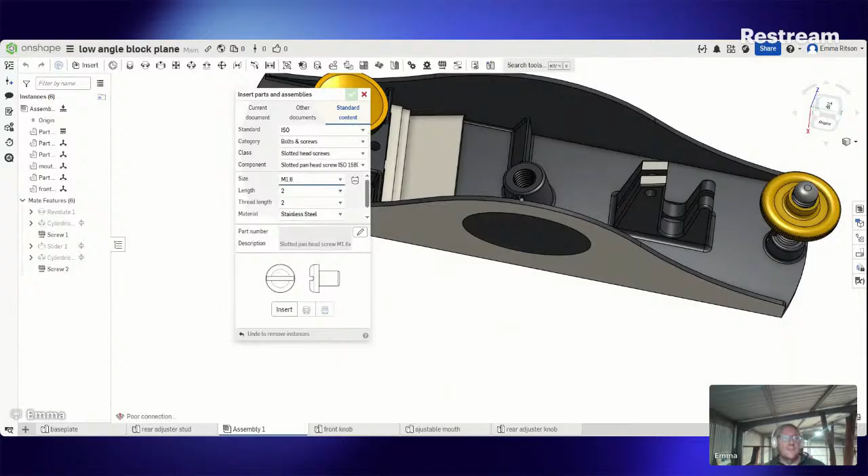Size M7 isn't there, it's a bit embarrassing. But if we need an M6 one, we can select that. And it wants to be what? How long? 15 mil? 16 millimeters? Probably in brass. There we go.

And we can put a standard screw in there. So that's one way of doing it. We might draw up a screw because it's a bit different to that. It's got a screw in the thread, but you can certainly just insert standard components. It hasn't got a thread on it. Not a very difficult thing to put a thread on, but there we go. So that's what we've done.

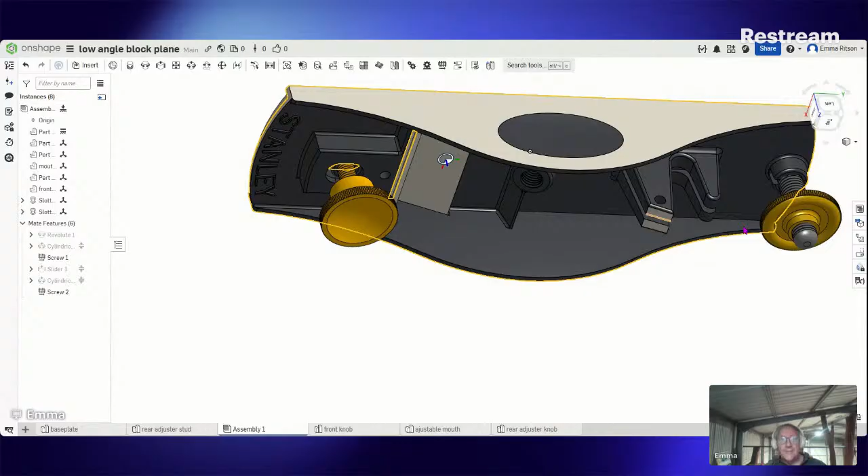We're getting there, there's still a fair bit to do, but it's starting to come together. If we get this front end piece working and this back end piece working, and a lever on here, which is a bit tricky, a couple of levers, and a blade and a cap, and this screw in there, we've got it finished. But it's starting to look something like, so I'm pretty pleased with that.

Pretty pleased with that. Anyway, I'm going to go to bed because I had a late night on Sunday night. I went up to Glen Innes. More about that trip tomorrow.

And didn't get home till way too late. And Monday was a bit of a cow of a day. We've had a bit of a cow of a week at work. Nothing that we can't sort of handle, and it's not anything that's a real hardship. It's just that we've got a machine out and we fixed what we thought was wrong, and it wasn't what was wrong. So we'll have to work on that.